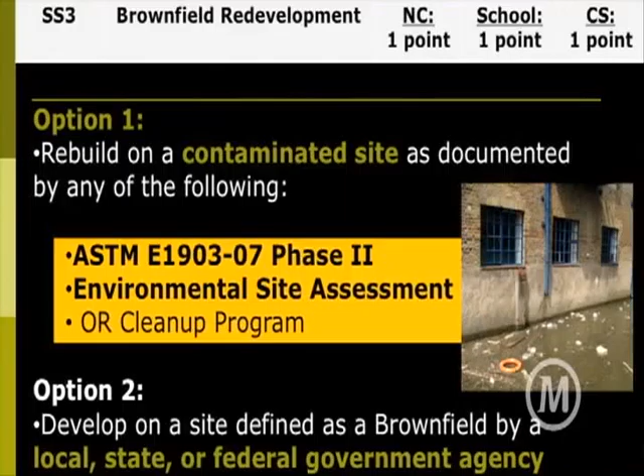Alternative fuel vehicles. Not just mass transportation, which isn't available to everybody in every location. We're lucky here in Portland, Oregon, but alternative fuel vehicles are also very important. So we're talking about hydrogen, ethanol, hybrid vehicles, or vehicles run by biomass or biofuels.

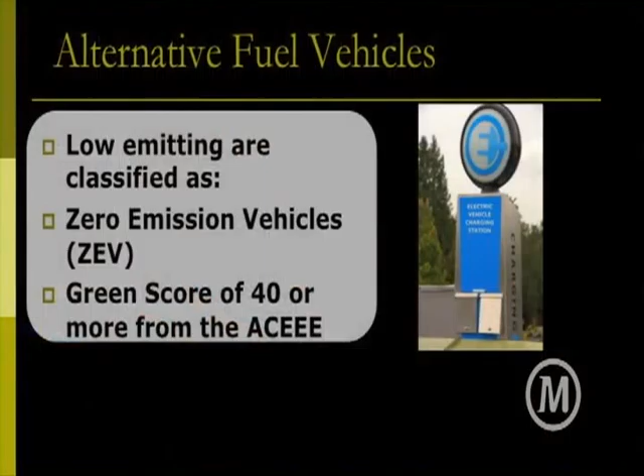But there needs to be some measure of how efficient these are, and that's what these standards do. They have to be classified either as a zero emission vehicle (ZEV), or have a green score of at least 40 or more by the American Council for an Energy Efficient Economy (ACEEE). By the way, that was a refueling station for electric cars outside the Hawthorne Fred Meyers you saw an image of.

So we're preparing for these changes. It takes infrastructure; we have to lay down the framework for some of these big changes to be possible. So it's good to see it emerging.

Sustainable sites, alternative transportation. This is an example where there are multiple credits associated with one concept. Sustainable sites credits 4.1 through 4.4 are independent credits, but they all have to do with alternative transportation in different ways. There's a credit dealing with mass transportation, bicycle parking, having racks available for people to bike, but not just the racks.

If you're going to work and you're all sweaty, that may not be appropriate for your profession—maybe it's okay, maybe it's not. So have a shower facility within the building for people working there or using that space. If they live there, they're assumed to have their own showers, but if not, you're thinking about showers in addition to covered racks, a safe place for people to store their bikes.

And the goal of it, once again intent is very important, is to create a transit-oriented development (TOD), reduce pollution from auto use, and reduce land development from auto use.

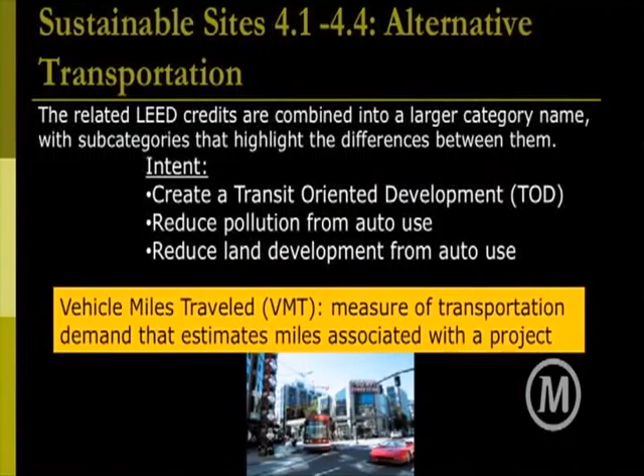So not only are you reducing CO2 emissions from the reduced number of people individually driving to places, but you're also reducing the amount of parking area you need—the impervious asphalt pavement that has problems with heat island effect and stormwater, which we'll take a look at. So it's multiple effects; you have to look at not just one element, but the many sides to all these strategies we're going to talk about.

Vehicle miles traveled, a metric you can use, VMT. It's the measure of transportation demand that estimates miles associated with the project. So if you have a carpool program, or parking spaces available for electric vehicles for a certain percentage of your building, then you're reducing the vehicle miles traveled associated with your project. You're taking that initiative.

Here's an example, much more heavily weighted in 2009, of alternative transportation and public transportation. It's basically encouraging you to take advantage of these amenities if they're in your area. So really in Portland, we don't have much of an excuse to choose a site that isn't pretty close to one of these things. 6 points for new construction, 4 points for schools, 6 points for core and shell.

But here's what we're really talking about today: 6 points. Do you guys remember how many points it took to get certified in the LEED 2009 rating system? 40? Yes. So 6 points is a lot for one credit.

And this is just to locate your building within half a mile of a commuter rail or subway, or within a quarter mile of 2 bus lines. You could locate your site there. When you're going through your eco-charrette and you have your scorecard out, you go, low-hanging fruit, this is easy for us—6 points, we're within a half mile of the MAX line if you're in Portland.

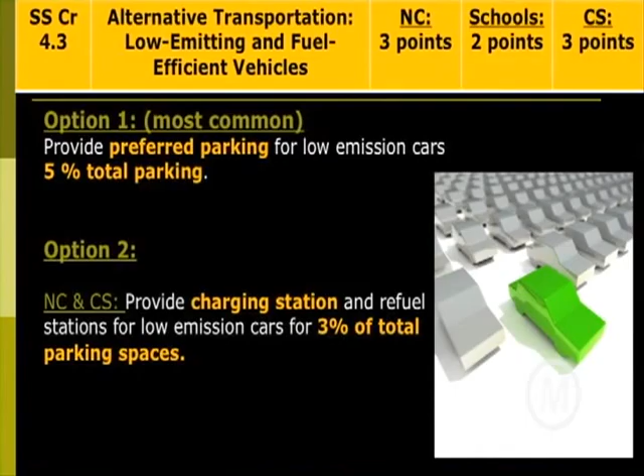This is something you want to identify early on in a project to know your opportunities. When you're setting these targets for LEED certification or sustainability, you want to know this is something important in the new rating system. So there are many incentives and inclinations to get certain certifications, in addition to just the good responsibility and showing that you took these initiatives.

So it's an example within the same sustainable sites credit 4 family, but it's 4.3, and here we're talking about low emitting and fuel efficient vehicles, like we looked at in that past slide—3 points for new construction, so still pretty heavily weighted. That's why it's in orange.

So that's providing preferred parking for low emission vehicles—it's the same for 5% of the total parking for one option. Option 2: provide a charging station to refuel those electric cars or whatever alternative vehicle it is, for 3% of the total parking spaces. So once again, you have options in many of these credits and how you achieve them.

So we're talking about 3% of the parking, or maybe 3% of the full-time equivalent occupant. This is another measurement that LEED uses for calculations. That's really what's useful about LEED—we're using a universal metric for understanding this green building rating system that evaluates how sustainable a building is.

Full-time equivalent occupant means you have to understand how many people are actually using the building. You're not just counting people, because some are part-time, or you're in a retail space where there are transient occupants coming in and out. So how do you calculate it? A full-time equivalent occupant is somebody in a building 40 hours a week—then their FTE value is 1.

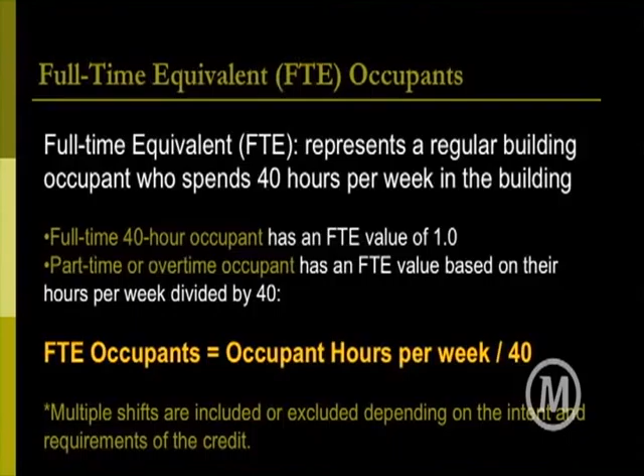This is an important concept that runs through many credits within the LEED rating system if you're doing calculations. For a part-time or overtime occupant, you take the hours per week divided by 40. So if you're 20 hours per week, working half-time, your FTE value is 0.5. Not scary math, but something you have to be able to evaluate—occupant hours per week divided by 40.

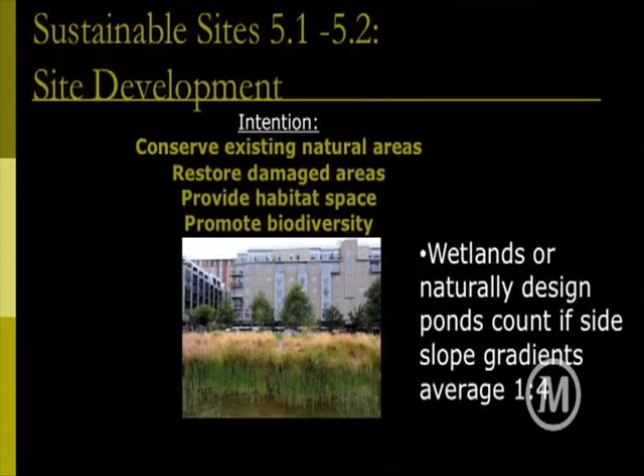Site development has 2 credits related to it, but the intent is the most important part: conserve existing natural areas, restore damaged areas, provide habitat space, and promote biodiversity. Biodiversity is that natural variation in the ecology and how these systems work that we really can't recreate. When we cut down trees and replant just one type, we're not recreating what was already there—we have to be cognizant of what's native in that area and what will actually survive there.

Wetlands can count towards open space in the LEED rating system, but if it's a big crater or something we've created, it can have a slope of 1 to 4 on its sides. Here's a shot of Portland showing a wetland-type area in the middle of a very vibrant community in the Pearl District. This was a choice made early on to preserve that land and let those natural ecosystems do their job—help with stormwater management, lower utility bills, and just let that site do what it's intended to do.

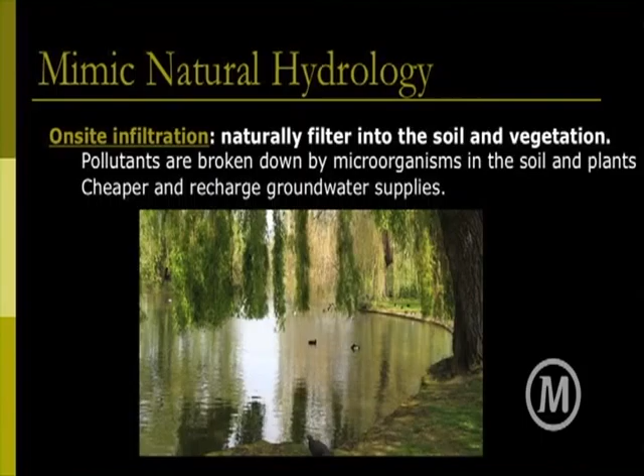You're mimicking natural hydrology. When talking about stormwater management, there are structural, man-made things we can do, and then more passive things where we try to mimic what the site would naturally do by itself—handling rainwater if we didn't have impervious surfaces causing runoff. On-site infiltration is where the LEED rating system really aligns with code, based on your state and local jurisdiction. In Oregon, on-site infiltration is a huge priority, pushed heavily in our codes and getting more stringent.

It's easier to have a LEED building in Portland because we're already pushing for energy efficiency in our 2010 energy code, and pushing for it in our stormwater management codes for buildings. So it's already aligning naturally with the LEED rating system—on-site infiltration just naturally infiltrates on site.

You have to check your soil permeability—somebody has to test how quickly the soil in your area can absorb water. Clay might be harder; it varies even within Portland what areas can infiltrate at what rate. I feel like a civil engineer might come out and design these systems, but it's important for all of us to be aware of why this is happening and why it's important.

Naturally, pollutants are broken down by microorganisms and by chemical, biological, and physical processes. If you let it sit for a long time, like a pond or wet detention pond, you give more time for this process to break down the chemicals. By the time it's absorbed back into the water table and aquifers, it's treated—it doesn't carry all those chemicals, unlike if it just shoots off our roads, bringing contaminants or fertilizers right into our rivers that some people are swimming in and trying to enjoy.

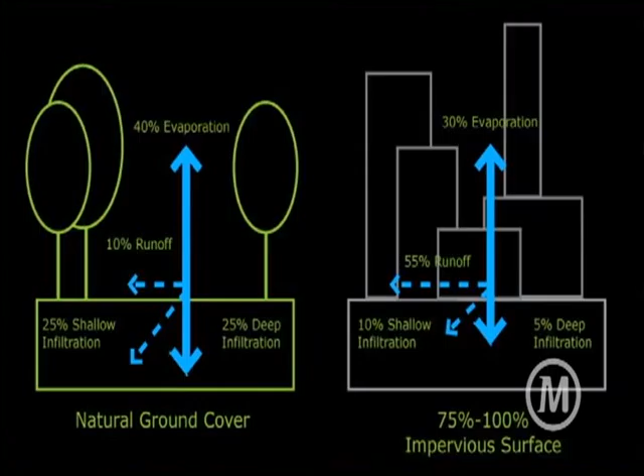Only 10% of it is runoff, some of it might flow away. And then it's 40% evapotranspiration, that's what vegetation naturally does.

It releases some of that back into the atmosphere. Here we've got impervious surface like 75 to 100%, not atypical for a developed area. And here we only have 5% going back into deep infiltration, recharging those aquifers. That's a problem. If we look long term, when we get to the water section, we'll see why this is such a problem and why we'll see some changes in the next few years.

55% of it is runoff, so we're just shooting it away. In Portland, we could be using this for many resources. California would be envious many months of the rainwater we could collect and reuse. Our codes are just catching up with that now, letting us actually use that rainwater for multiple sources, which we'll look at in the water section.

Strategies. So once again, there's structural things you can do, non-structural things you can do. These are really pretty cost-effective things to do.

Rain gardens can be a nice aesthetic to a building. Vegetative or bioswales, vegetated swales or bioswales, kind of interchangeable.

Underground parking - if you have underground parking, you have less asphalt covering the site, so you have more opportunities for impervious surface reduction and vegetation. That's also a synergy with a few other credits, open space, keeping nice vegetation, and also heat island, which we'll look at.

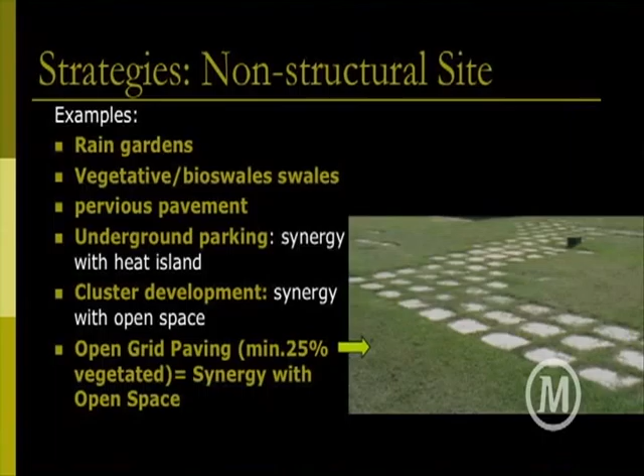Open grid paving, that's the photo right here, showing that if it's 25% vegetated, then you can call it open paving according to LEED, and it can count towards vegetated space for some credits. I think I can walk on high heels and still get around here.

Porous pavement or permeable asphalt, there's a few variations of this. It's allowing - now this could look pretty similar to your typical asphalt - for water to infiltrate through that asphalt.

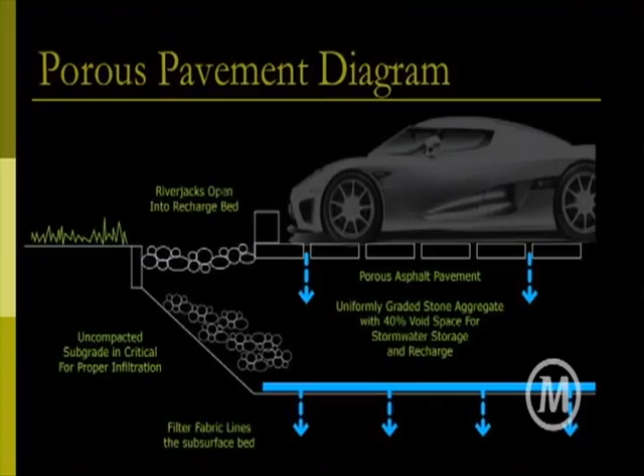And below that, this is just a diagram of having this uniformly graded stone. It needs to be 40% void space to allow that water to keep coming through. And then in this case, since it might be heavy traffic with a lot of discharge from cars and things, we may want a filter fabric before we let it go back into that deep infiltration layer.

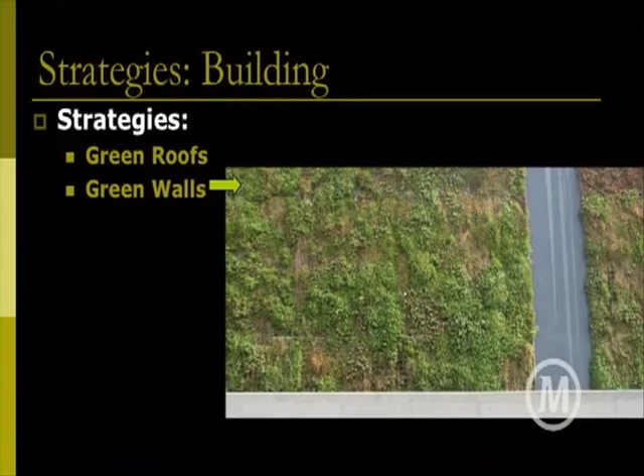More strategies. Once again, looking at a new model of building maybe - they don't have to all be boxes, we can think differently. Green roofs would be a way to handle stormwater management, give more open space, once again reduce heat island - synergies in the impacts and benefits we get.

Here's an example of a green wall, but this is an envelope of a building. The close-up is to show water actually funneling down from the roof and going into this collection area, feeding this green wall and possibly being reused for other resources.

And this green wall can have many benefits depending on your climate. Maybe you want that shading to cool your building down. Many benefits can come from this, helping the air quality and so on.

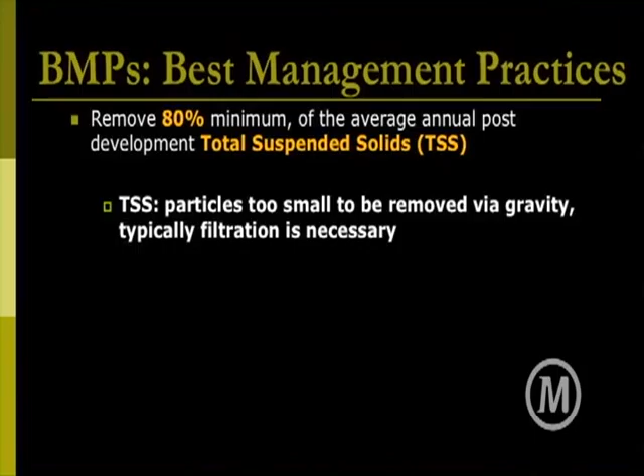Best management practices. So once again, this is for our stormwater management, really about treating the quality of the stormwater runoff before it leaves your site. So you're reducing the total suspended solids - we talked about turbidity, those little particles too small to settle to the bottom of the stream or river because they're just hovering.

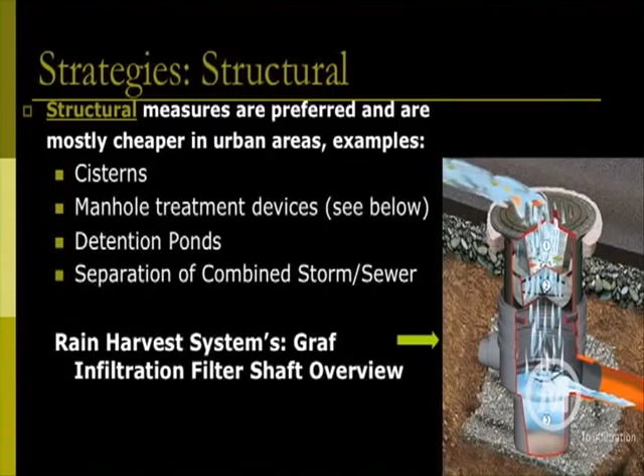So in that case, you would need some sort of filtration, and here's one example of how to do that. Rain Harvest Systems manufactures this infiltration filter. It goes right in this manhole, and then it goes through several layers of filtration before it actually goes back to the main line.

Detention ponds are an example. Cisterns are for large collection of rainwater harvesting for reuse. And as for LEED purposes, separation of a combined storm and sewer is encouraged.

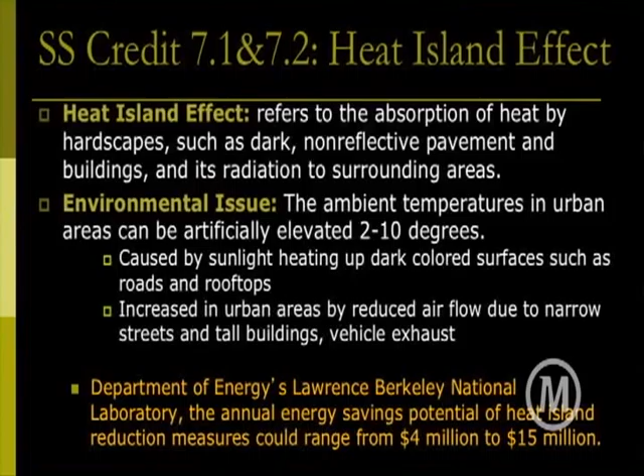All right, sustainable sites credits 7.1 and 7.2, heat island effect. These last three families of credits we're talking about are very important because what we're really talking about here is synergy - if you start looking at these strategies, they're all working together. So heat island effect is what happens from dark, non-reflective surfaces collecting that heat, we've all felt it, and then radiating it back up.

All right, so we're looking at strategies for reducing heat island effect. But remember, these credits we're talking about right now—stormwater management, maximizing open space, heat island effect—all have a lot of synergies and things that work together.

So when we look at this strategy, minimize the development footprint, all of a sudden you have more room for either vegetation. This case right here is a grass paved system, and it's actually drivable back to this garage, so it can infiltrate the stormwater. You don't have the asphalt, so you have reduced heat island effect and more green space.

Ideally, if this wasn't a grass paved system and it wasn't a driveway, we'd want native vegetation. That's what infiltrates stormwater the best. It's very important because grass doesn't really do the job. But in this case, a grass paved system hopefully has also laid a permeable surface underneath it that has good infiltration.

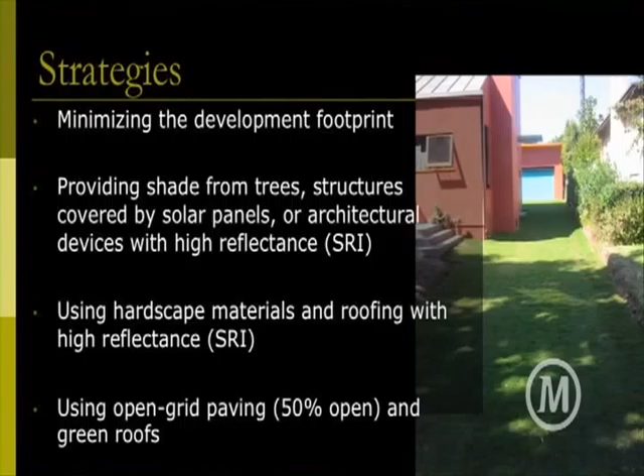So for heat island, provide shade from trees and structures, or something that LEED 2009 started to incorporate—it counts PV panels as well. So shading on a roof from PV panels is seen to be reducing heat island effect.

There's an interesting synergy between green roofs and PVs. PVs don't function as well, many of the systems, the more heated up they get. So if you have a green roof underneath it, that can actually be weighting down the panel itself, helping with wind uplift and the structure you need, and helping with its efficiency because it's cooling the ambient temperature of where the PV is at on the roof, because of that evapotranspiration we saw in that diagram with stormwater management.

Using hardscape materials and roofing with high reflectance—so SRI. Do you guys remember what that stands for? Yes, well done. Solar Reflectance Index.

So that's what we're looking for when we're choosing our roofing material. You want high Solar Reflectance Index. And that also applies to on-site materials, so that's concrete, that's any number of paving systems. You can calculate that SRI value and help make that decision.

And it can inform other decisions, like putting slag into your concrete often makes it lighter. So it's actually usually cheaper, recycled content, and you're reducing heat island—a lot of synergies with it. Or use open grid paving, 50% open, as we saw with vegetation in the previous slide.

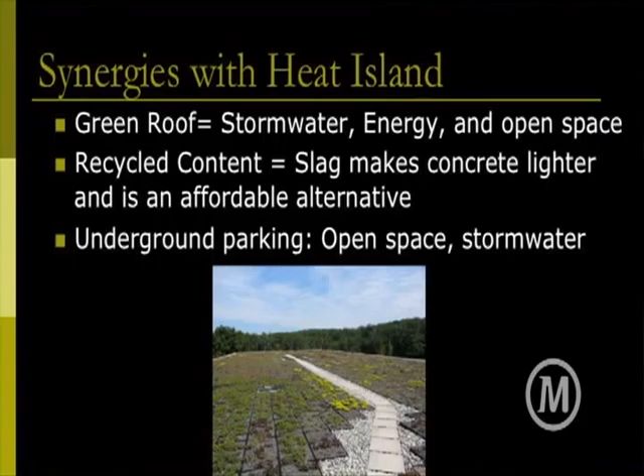Recycled content: look at slag in your concrete or fly ash. These both have recycled content in them and are good products you can incorporate into your concrete. So don't just look at SRI value—think about what's actually going into these products themselves, depending on what type of system you're doing.

Underground parking has synergy with open space, stormwater, and heat island.

Light pollution: minimize light trespass from the building and the site. So we saw when we looked at regional priority credits, this was important to Michigan. They made it one of their top 6 credits that are most important to a rural area in Michigan. So that's why they made that important for them—to reduce sky glow.

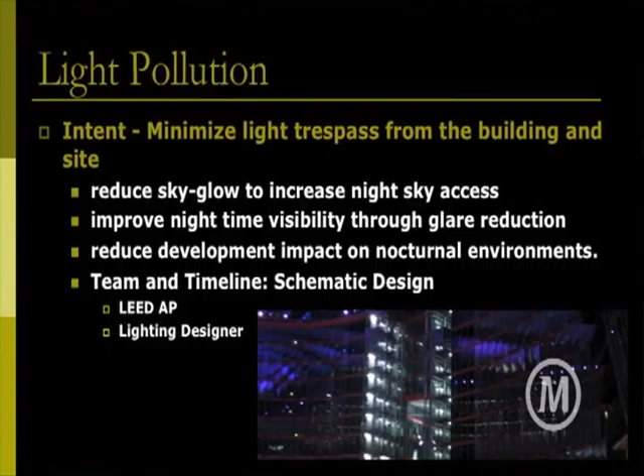So you're increasing sky access, you're seeing stars. That's why we like to go camping or the mountains or somewhere, the beach, where we can actually enjoy that natural atmosphere. So you're improving nighttime visibility, glare reduction, safer for driving, reducing development impact on nocturnal environments. That's a big one, like in rural Michigan.

And you want to look at this early on. So in schematic design, you want to be thinking about what type of exterior lighting fixtures you're choosing and how you're designing your site, integrating that into part of the process early on. If you have a lighting designer, that's fantastic, but if we're an educated team, we can all be working together on these ideas.

Quotient Lighting has a lot of really interesting solutions. They were a part of the first Office of the Future, which is an interesting thing happening with the utilities down in Southern California. Glumac's new headquarters got this new Office of the Future certification, and they were using Quotient lighting because Quotient's really looking at real solutions—they're looking holistically.

Like this fixture right here is mounted to a desk, and it's helping with task lighting. So you don't have to have as bright of ambient lighting, so you can reduce that energy consumption. Once again, we have cost savings there.

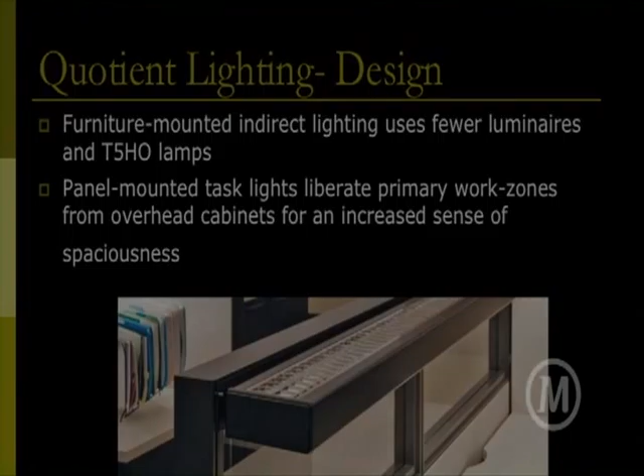And it's not, you know, a big lamp sitting in the corner that you have to avoid when you're pushing papers around, because some people don't like that—that's why they don't like task lighting. So this is a nice little integrated system for task lighting with the luminaire right in there, and those are T5s, so they're more energy efficient. So the primary work zones have more flexibility and spaciousness.